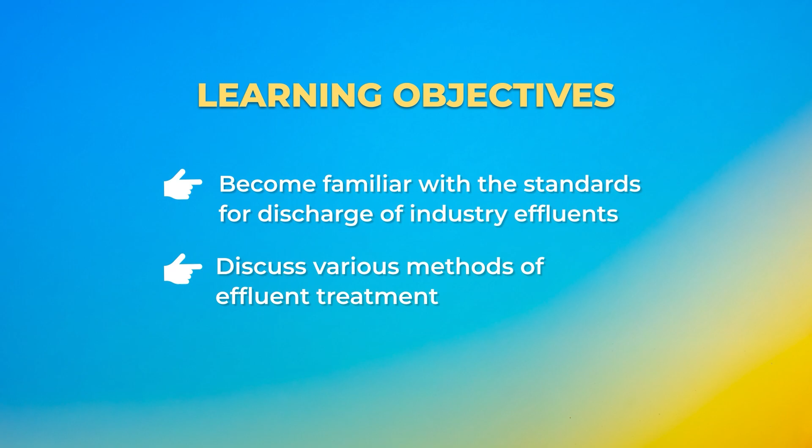Let us begin with the benefits of liquid waste management. First and foremost, proper liquid waste management can help ensure public health and safety. If the wastes are properly managed and treated, that can prevent the spread of diseases and maintain hygiene and sanitary conditions in the food industry.

Secondly, this will help minimize the environmental impact. If liquid wastes are not treated properly and are discharged into the environment, that can pollute water sources, as they contain a high quantity of organic matter. For decomposition of organic matter by microbes, oxygen is required. So the oxygen in the aquatic source will get depleted because of this dirty wastewater from the food industry, endangering the life of aquatic flora and fauna.

There is also a chance of decomposition of organic content by microbes in anaerobic conditions, leading to production of greenhouse gases that pollute the air and produce foul smell. The microbes and chemicals present in the wastewater can also contaminate the soil. All of this can be taken care of if liquid wastes from the food industry are managed properly, reducing the environmental impact.

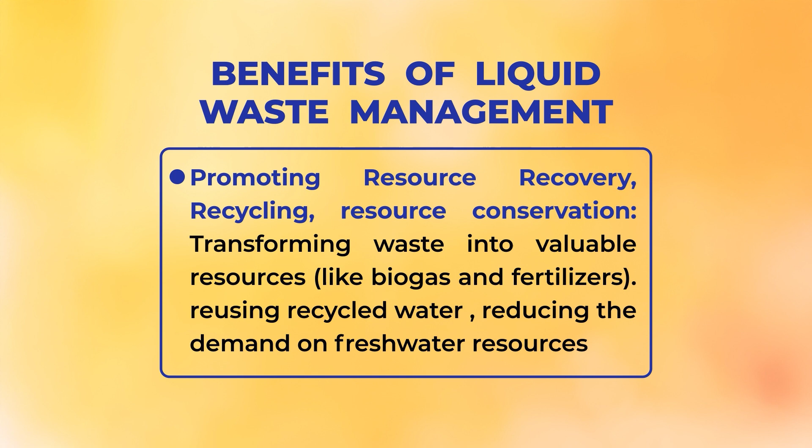Next, this will also help promote resource recovery. Some important nutrients or resources like water or energy can be recovered from proper management of liquid wastes. The liquid wastes will be recycled, and resources can be conserved. For example, if recycled water can be reused as a potable or non-potable source, there will be reduced demand for freshwater resources.

And lastly, this proper management of liquid waste also helps to comply with regulations for wastewater discharge into the environment.

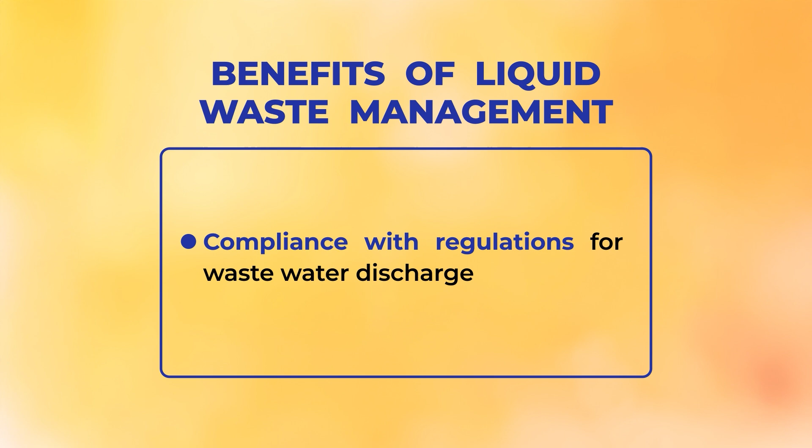Let us now see the different sources of liquid wastes in the food industry. The quantity and quality of the effluents or wastewater depend on the type of food processing industry involved. Liquid waste can be generated at different steps, starting from production, processing, preservation, and marketing. The water involved in processing the food can also form wastewater, and different parts of the food can form liquid waste in the food industry.

For example, in fruits and vegetable processing, the water used for washing the fruits and vegetables can form wastewater. And in fruit juice processing, in the canning section, the blanching section, and the washing section, some water is used which can also form wastewater.

In the meat and poultry processing area, water used for washing the carcass, washing the meats and the organs, can form wastewater. And the blood, if it is not collected properly, can also get mixed with the wastewater, forming wastewater.

The fat of the animals, similarly for fish processing also, the oils, the blood and washing water can form the wastewater. In the dairy processing unit, the liquid, the rejected milk, the whey, the buttermilk, cream, butter, these can also form the part of the wastewater.

In the beverage production area, the wastes can contain sugars, fruit pulp, and also from the alcoholic beverage production area, the fermented byproducts. From baking and confectionery, water from dough mixing or cooling. Wastes can also come from sugar, fats, tea, coffee and chocolate processing. From canning and preservation, brine, preservatives, acids can also form the wastewater. These are about the wastewater generated from food processing operations.

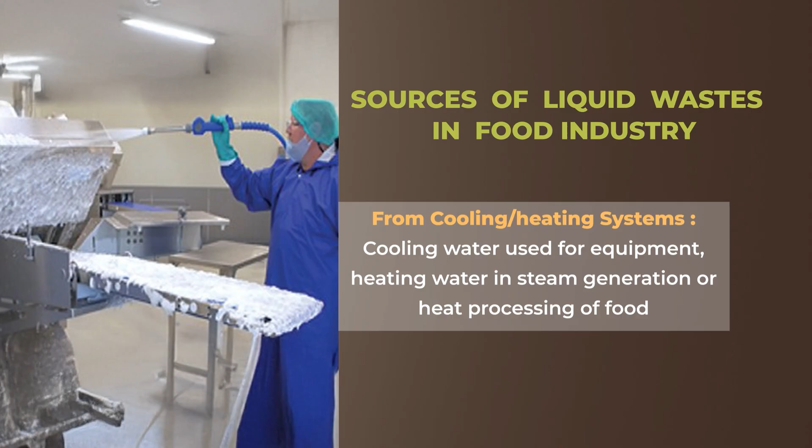From cooling system or heating system, the heating system for heating water in steam generation or for heat processing of food, that can also form liquid waste in the food industry. So these are the various sources of liquid waste in the food industry.

And as these liquid wastes come from different industries, they contain high quantity of organic content. So the characteristics of wastewater from food industry are like high organic content. All the wastewater contains fats or oils or proteins or sugars or starches, and accordingly there will be high level of biological oxygen demand, that is BOD, and chemical oxygen demand because of the high organic content.

Then another characteristic is that wastewater can have high nutrient load. So nutrients like nitrogen that can come from proteins, phosphorus that can come from additives. Then there will be also high suspended solids in the form of organic and inorganic particles, food debris, fibers that can be present in the wastewater.

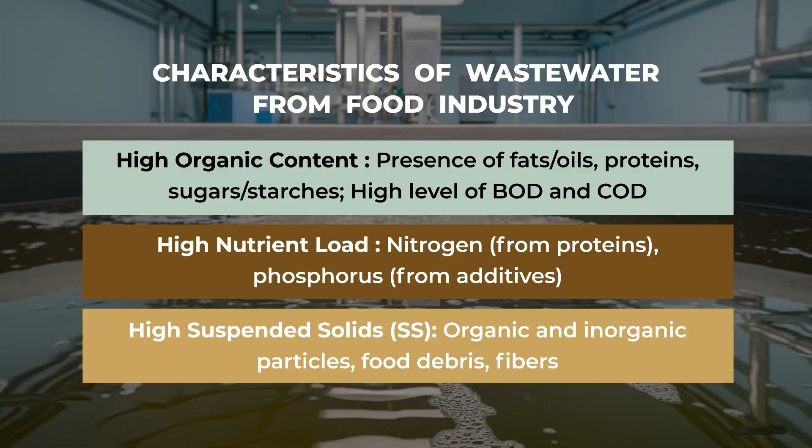Then there can be variable pH levels. pH level can range from acidic to alkaline. For example, in fruit juice and vinegar processing, that wastewater can be acidic in nature. From the dairy and meat processing area, wastewater can be alkaline in nature.

Then there can also be presence of fats, oils and grease, which are also known as FOG. That is very common in meat processing, dairy processing, frying and bakery operations.

Then color can also be an important characteristic of wastewater, because sometimes wastewater can also be discolored, especially from fruits and vegetable processing because of application of some food additives, coloring agents, and also the discoloration may be due to the decomposition of organic matter present in the wastewater.

Then there can also be odor, unpleasant smells due to the production of different sulfur, ammonia, phenolic compounds from the decomposition of organic matter and fats. There can also be turbidity because of the suspended solids and organic materials present in the wastewater.

Toxicity is also another important characteristic, because this wastewater can have some harmful chemicals, can have pesticide residues, heavy metal residues, detergents and sanitizers. It can also have different types of microbes, maybe bacteria, fungi, algae, protozoa, virus, etc. So these are the important characteristics of wastewater from the food industry.

So based on these characteristics, certain parameters have been decided which are to be considered for discharge of wastewater. And these important parameters are like the BOD, that is biological oxygen demand. So that is the measurement of the amount of oxygen which is required by microorganisms to oxidize or decompose the organic matter over a period of specific time at a specific temperature.

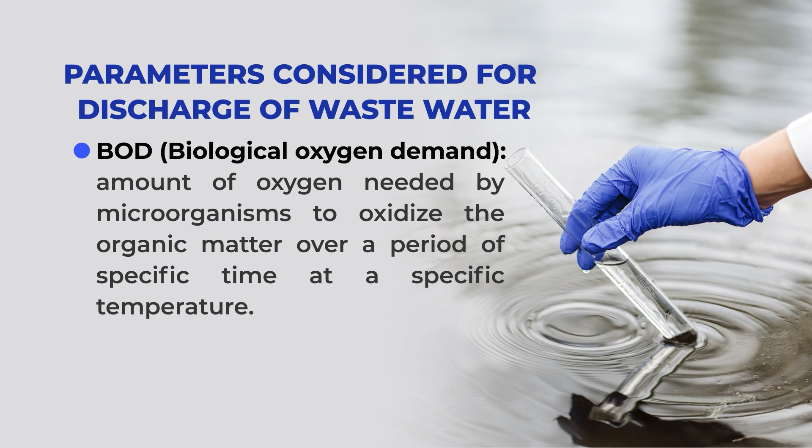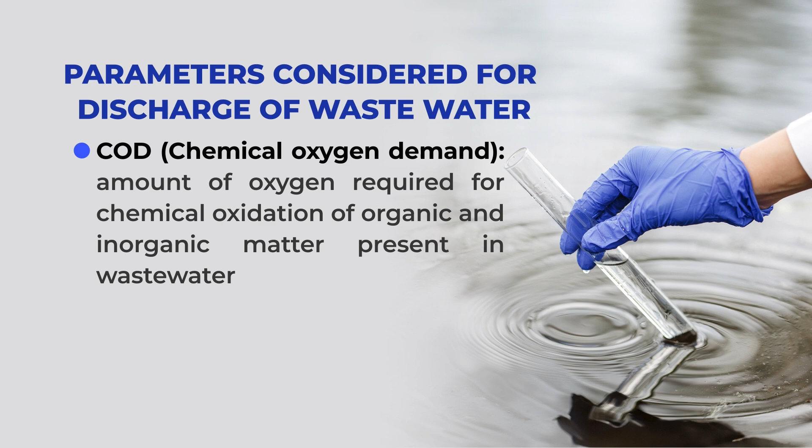If it is done for 3 days, then it is called BOD 3; if it is done for 5 days, it is called BOD 5. Then another important parameter is COD, that is chemical oxygen demand, that is the measurement of the amount of oxygen required for chemical oxidation of organic and inorganic matter present in the wastewater.

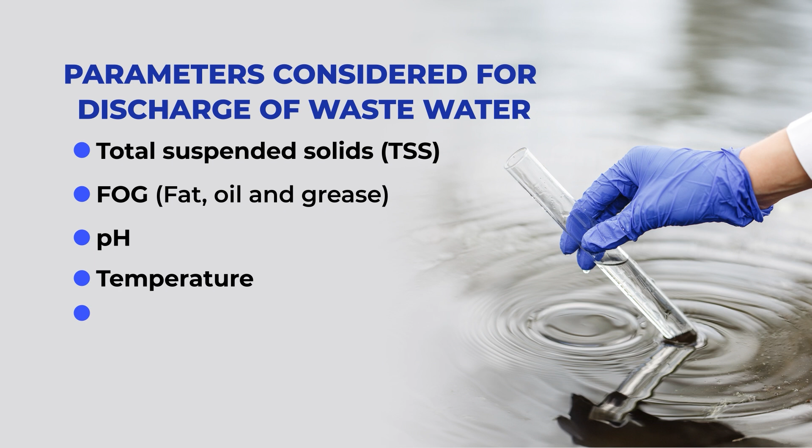Then total suspended solids or TSS, FOG, that is fat, oil and grease, then pH of the wastewater, the temperature of the wastewater, then color, turbidity, residual chlorine, residual nitrogen, ammonia, etc. All these are important parameters. There are many more parameters, but these are normally considered for the discharge of the wastewater.

So any food industry in our country, they have to follow certain rules and regulations regarding the discharge, disposal of the liquid waste into the environment.

The relevant food laws include the Food Safety and Standards Act 2006, according to which the food industry has to maintain certain sanitary and hygienic conditions, including some requirements regarding waste disposal.

Then there are acts like the Water Prevention and Control of Pollution Act 1974, Air Prevention and Control of Pollution Act 1981, and the Environmental Protection Act 1986.

As per the requirements of these acts, the Central Pollution Control Board has set discharge standards for various parameters of wastewater. Let us have a quick look at these CPCB standards. There are many parameters mentioned, such as BOD, COD, oil and grease, suspended solids, pH, and different chemical residues.

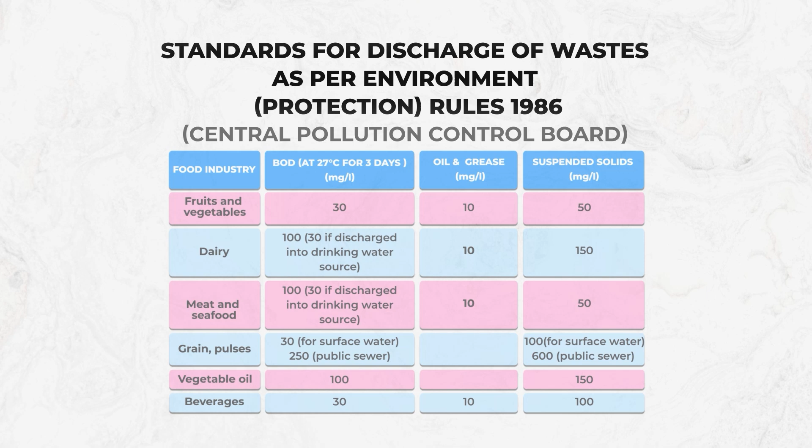In this table, I will show you only 3 parameters for different wastewater from various food processing areas. Here you can see the maximum permissible limits for BOD, oil and grease, and suspended solids, all expressed in milligrams per liter of wastewater, as per ppm.

For the BOD of wastewater from the fruits and vegetable industry, if it is to be discharged into the environment, the BOD should be maximum 30 ppm, oil and grease should be 10 ppm, and suspended solids 50 ppm.

For wastewater from the dairy, meat and seafood area, the BOD level should be maximum 100 if discharged into surface water, into the public sewer. If meant for discharging into drinking water sources, the maximum permissible limit is much lower, only 30 ppm, for both dairy or meat or seafood sections.

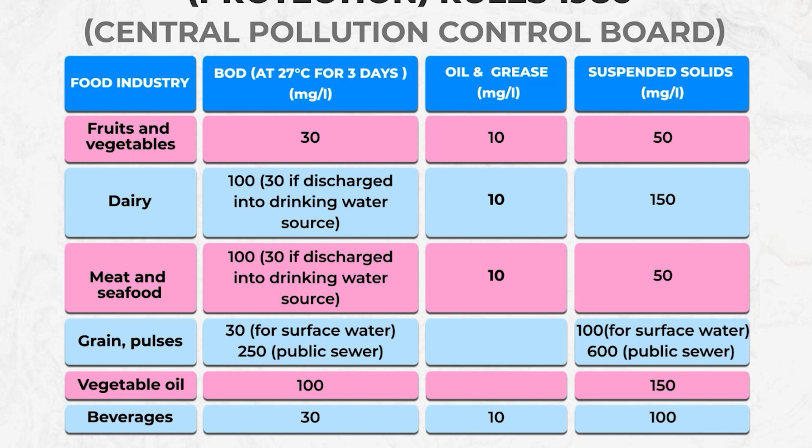From grain and pulses, the maximum permissible limit of BOD is 30, for suspended solids it is 100; if discharged into surface water in the public sewer, suspended solids can be higher, maybe 600 ppm. Same applies for vegetable oil and beverages.

For achieving these standards for discharging wastewater into the environment, the food industry needs to manage liquid waste very well. The first and foremost important part is prevention or reduction of liquid waste generation, that is reduction at the source, where if taken care of properly, can reduce the quantity of waste generated.

This can be done by implementing a very good production system, optimizing all production and processing operations, regular maintenance of equipment, and training of employees. This way the quantity of liquid waste can be reduced at the generation point itself.

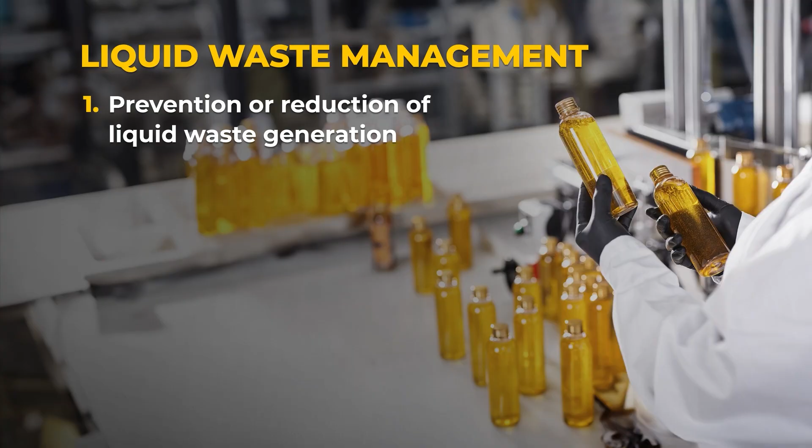After that, some important liquid waste can also be utilized for byproduct utilization. For example, whey is a byproduct of cheese production. If not used properly it becomes wastewater, but if processed it can be used for preparation of whey protein drinks, powder, or whey protein concentrates. Similarly, blood obtained from the meat industry, if collected properly and processed, can be used for edible purposes, for preparation of animal food like blood meal, and can also be used in the pharmaceutical industry. This way some wastes can be used for byproduct and value-added product preparation.

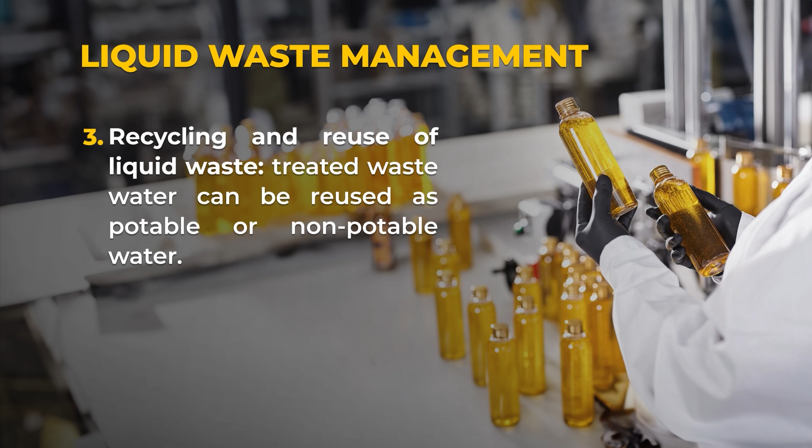After that, the wastewater can also be recycled and reused. Treated wastewater can be reused as potable or non-potable water depending on the final quality of treatment. It can also be used for recovery of nutrients, such as nitrogen or phosphorus, or for resource conservation, like recovering biogas from the processing of wastes.

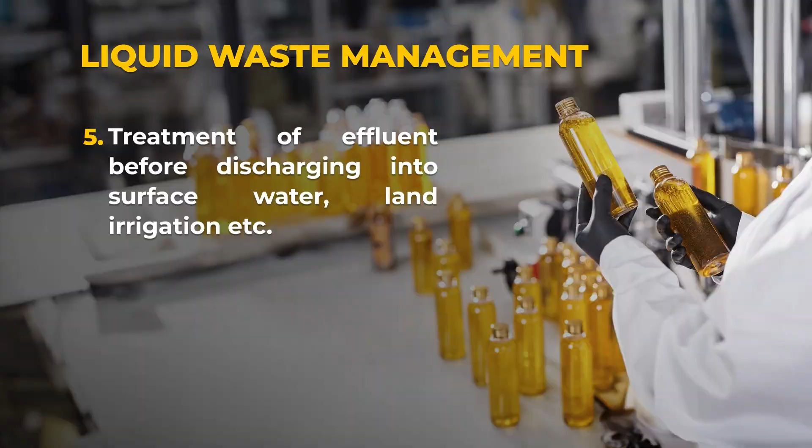And if these are not possible, if the food industry has to discharge wastewater into the environment, they also need to treat the effluents before discharging into surface water or land irrigation, etc. So for the treatment of wastewater, the food industry needs to have an effluent treatment plant, called ETP.

The design of the ETP depends on various factors, like the size and capacity of the industry, the volume of wastewater generated, the wastewater characteristics, the required characteristics in the treated effluent, budgetary considerations, and whether it would be viable to go for systems that generate energy like biogas or heat.

Depending upon all these factors, the industry needs to design their ETP, and it is not possible for all food industries to have their own ETP. For example, small food processing industries may not have a proper ETP, but they also need to at least give pre-treatment or primary treatment to the wastewater to reduce the organic content load and reduce the microbial load, through physical and chemical processes, before they discharge it into the public sewer for further processing.

For large food industries, they can have a proper ETP and use physical, chemical and biological methods along with advanced technologies to treat the wastewater, and can reuse it or discharge it into the environment. Now we will see the different methods of wastewater or effluent treatment.

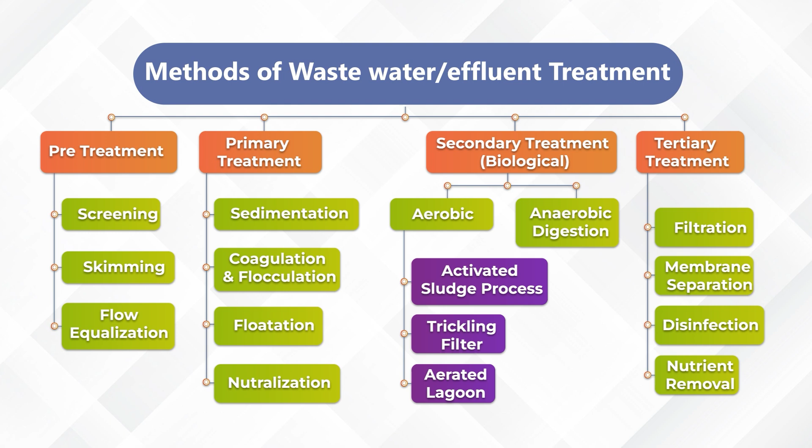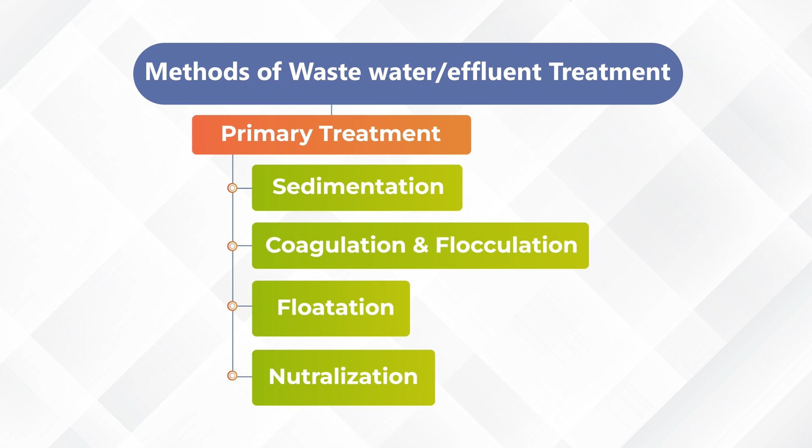For effluent treatment, industries can follow various physical, chemical and biological methods. At the pre-treatment stage, physical methods like screening, skimming and flow equalization can be adopted. Next is primary treatment, where physical methods like sedimentation and flotation are used, along with chemical methods like coagulation, flocculation or neutralization. The next stage is secondary treatment, which is also biological treatment, since microbes are utilized for decomposition of the organic content of the wastewater.

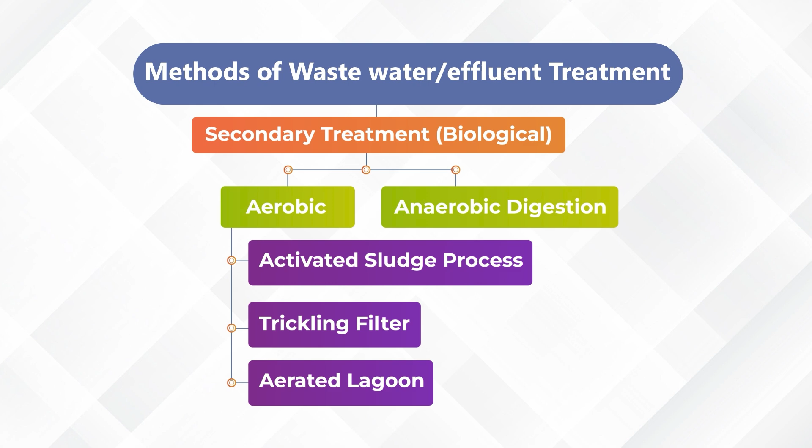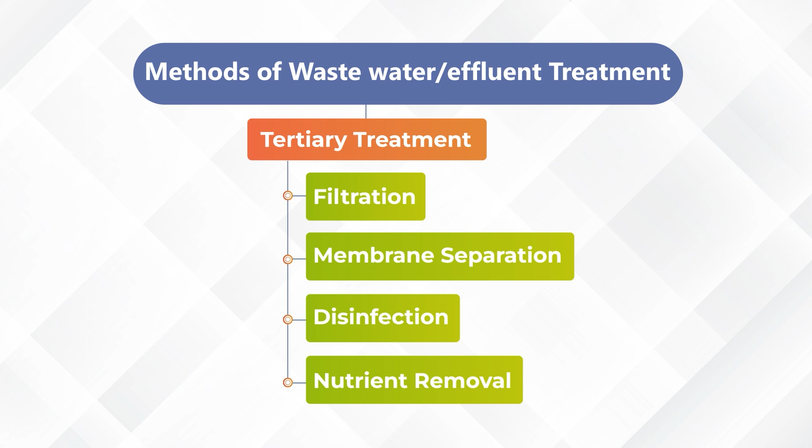In secondary treatment, there can be aerobic digestion or anaerobic digestion. For aerobic digestion, methods like activated sludge process, trickling filter, and aerated lagoon can be used. For anaerobic digestion, anaerobic lagoons or anaerobic digesters can be used. After secondary or biological treatment, you can also go for tertiary treatment, where methods like filtration, membrane separation, disinfection and nutrient removal can be done.

Now I will discuss all these methods one by one. In the pre-treatment phase, screening, skimming and flow equalization are done. Screening is the first and most frequently used process for removal of large solid particles, using different types of screens like vibrating screens, static screens or rotary screens. Sand or gravel-like components can also be removed using grit chambers.

Skimming is used for removal of large floatable solids present in the wastewater. Floatable solids can include fats, oils or grease. These can be removed by the skimming method, which helps prevent clogging of pipes. Skimming can be enhanced by mechanical aerators and also by addition of chemicals like lime, alum, etc.

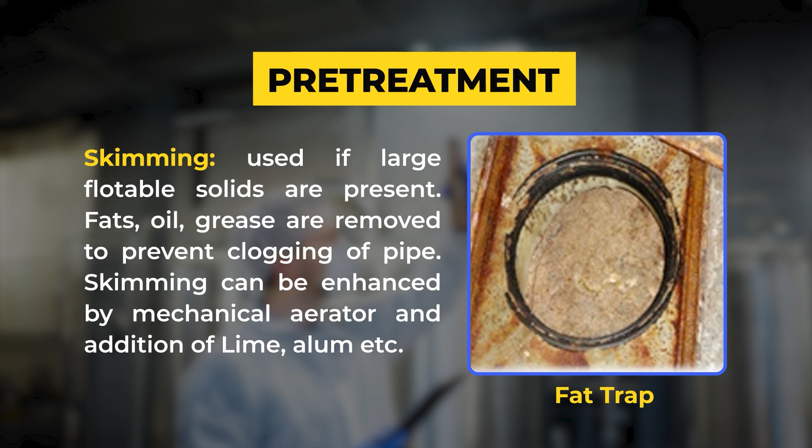The next method is flow equalization. This is important because in a food processing industry, liquid waste is not produced in equal quantity throughout the day or operational time. So, to overcome operational problems due to flow variations, equalization is very important, and the flow rate should be uniform. For this purpose, an equalizing tank is used, which can store wastewater for recycling and reuse, and also feed the flow uniformly to the treatment facility throughout the day. This is also designed for sufficient mixing of solids, which prevents sedimentation.

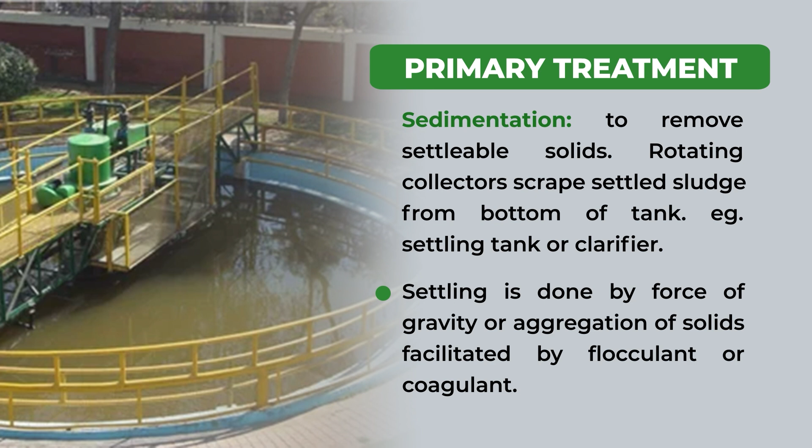After pre-treatment, the wastewater goes for primary treatment. The first physical method here is sedimentation, which helps remove settleable solids. Rotating collectors used in the settling tank or clarifier scrape the settled sludge from the bottom of the tank. Settling can be done by force of gravity, or aggregation of solids can be facilitated by flocculants or coagulants.

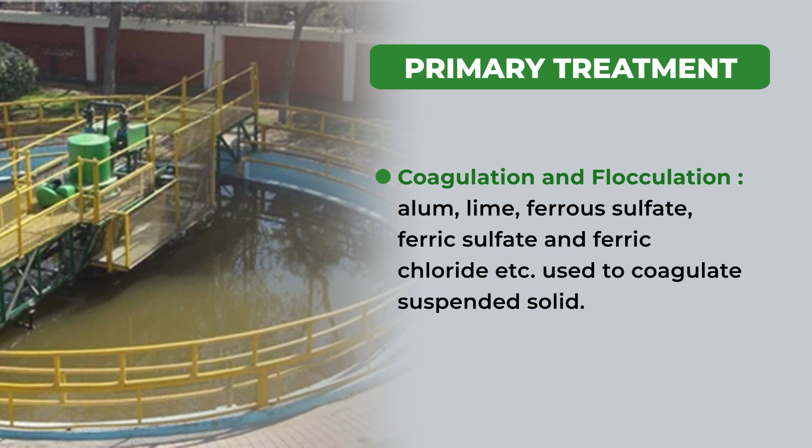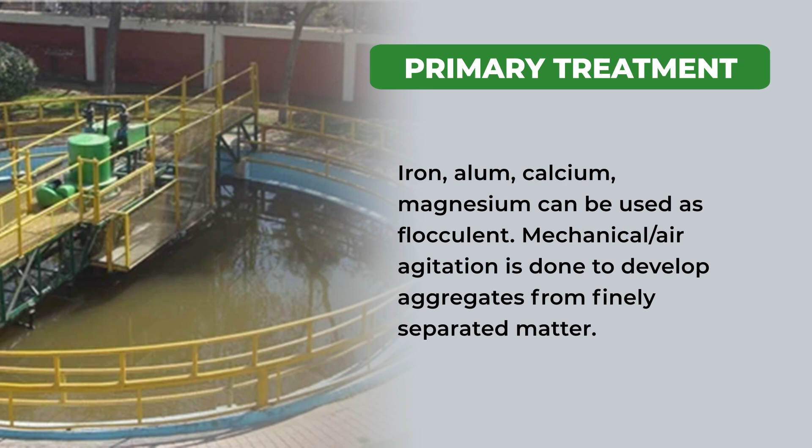As coagulants, alum, lime, ferrous sulphate, ferric sulphate and ferric chloride can be used to coagulate suspended solids, and as flocculants, iron, alum, calcium, magnesium can be used. Mechanical or air agitation is also done to develop aggregates from finely separated matter. The next physical method is flotation, which is done to remove solid or suspended particles by introducing air bubbles.

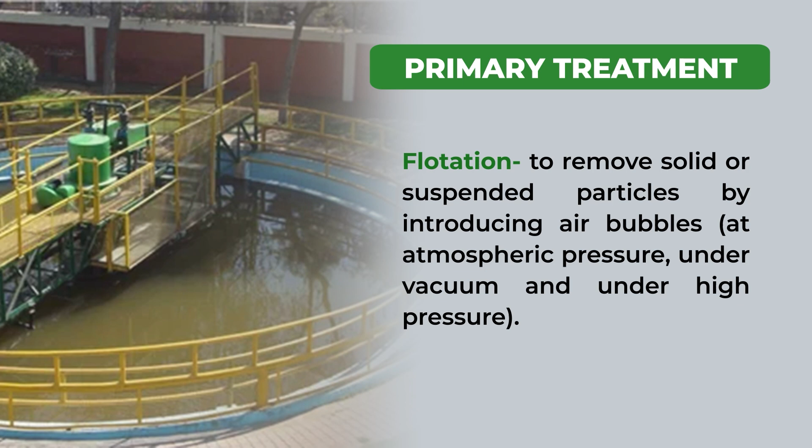Air bubbles can be introduced in the wastewater at atmospheric pressure, under vacuum, and under high pressure. One good example of this flotation is dissolved air flotation, which is widely used. Suspended particles rise to the surface to form a scum blanket, which is separated by skimming devices, and oil and grease are also removed easily by this flotation method.

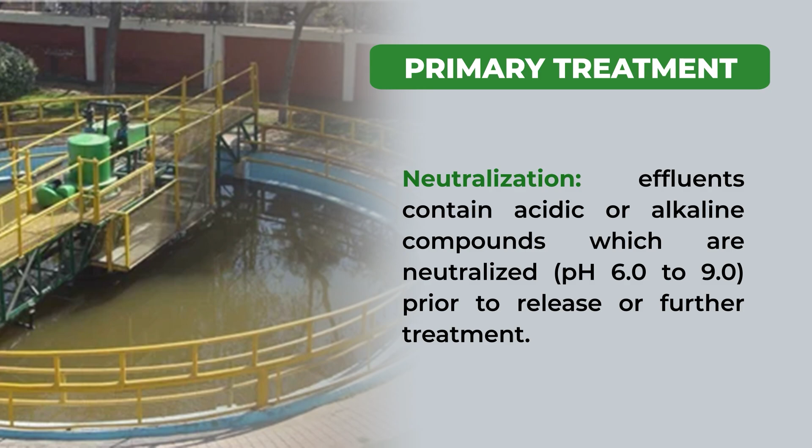The next method is neutralization, a chemical method of treatment at the primary treatment level. Effluents contain acidic or alkaline compounds. For example, from vinegar production or fruit juice production, the effluent can contain acidic components, and some effluents can have alkaline components. So the pH of the wastewater can vary from pH 6 to 9.

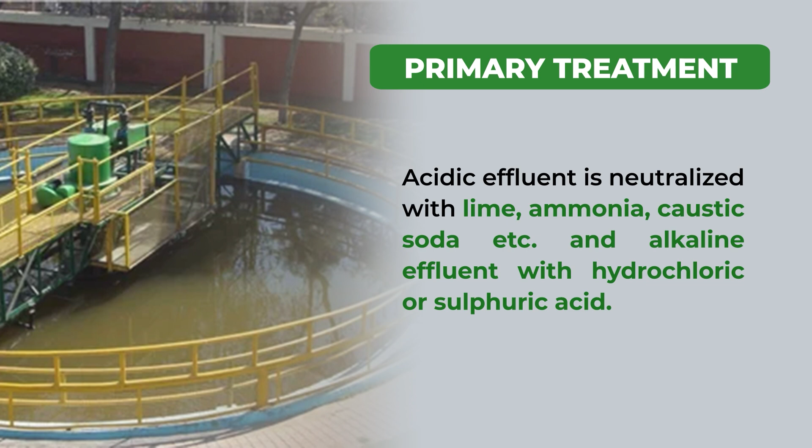Just to neutralize that, different neutralizers can be used. Acidic effluent can be neutralized with the help of lime, ammonia, or caustic soda, and alkaline effluent can be treated with hydrochloric acid or sulfuric acid, etc., to neutralize it. After all this treatment, whatever sludge is produced, that collected sludge from the primary treatment should be concentrated and treated before final disposal.

After the primary treatment, the treated wastewater is sent for secondary treatment, where microorganisms help in decomposition of the organic and inorganic components present in the wastewater. Secondary treatment can be anaerobic or aerobic.

First we will see the anaerobic digestion of organic components. Anaerobic digesters are lagoons that produce methane, carbon dioxide gas, etc. It helps produce a lesser quantity of sludge, and the BOD reduction is almost 60 to 80%, and normally it is followed by aerobic lagoons or trickling filters. It is a cheaper method and produces less amount of sludge.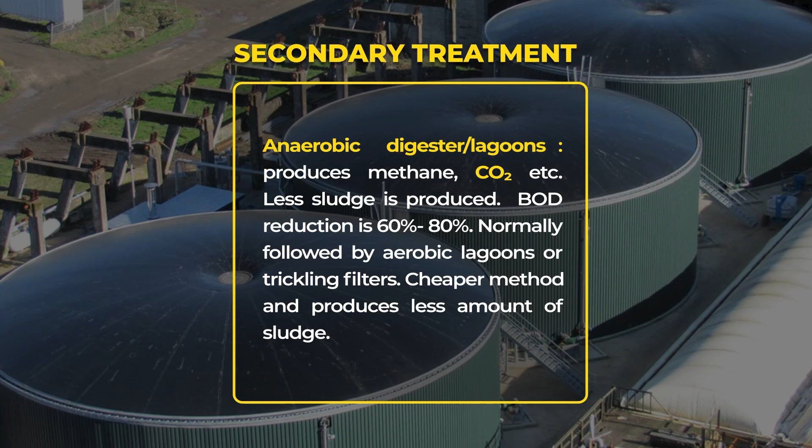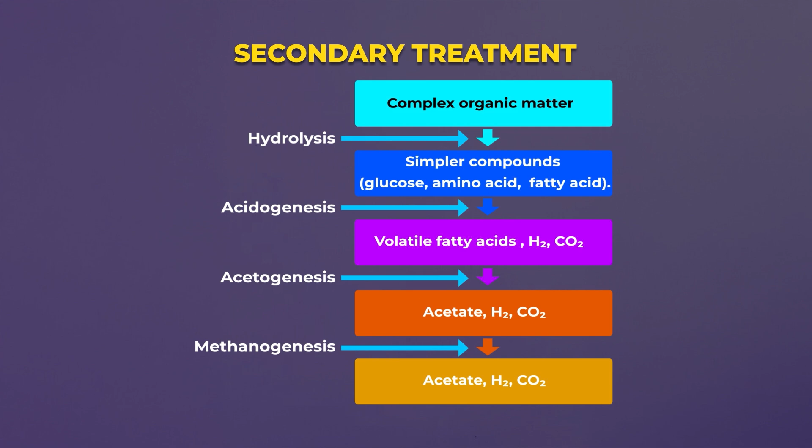Then comes the role of acetogenic microbes, which convert these volatile fatty acids to acetate. Then methanogenic microbes convert the acetate into methane, carbon dioxide, water, and biomass. This is how the biomass, that is the sludge, is produced, and the methane gas is produced, which can be used as biogas or a source of heat energy.

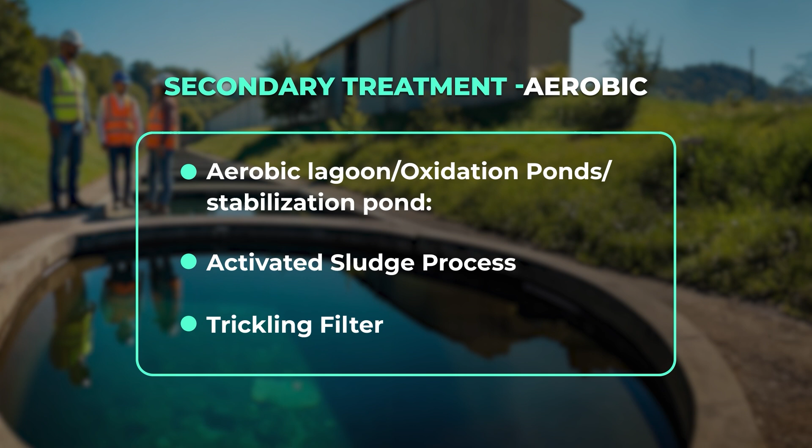In aerobic secondary treatment, there are different methods which can be followed, like aerobic lagoons, oxidation ponds, activated sludge process, trickling filter, etc. In aerobic digestion, microbes degrade organic matter to carbon dioxide, water, and biomass, and this process reduces the BOD and suspended solids to a great extent and produces a good quantity of sludge also.

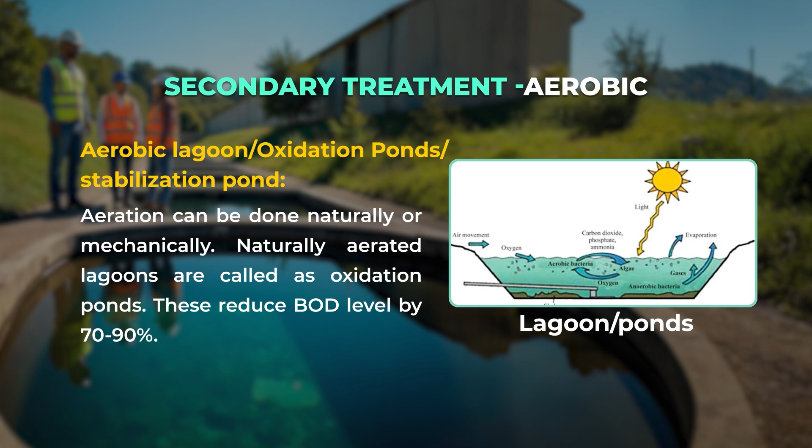Now we will see what happens in the aerobic lagoon, oxidation pond, or stabilization pond. These are shallow ponds where algae and bacteria work together in presence of oxygen and sunlight and degrade the organic matter present in the wastewater. Aeration can be done naturally or mechanically. If naturally aerated, lagoons are called oxidation ponds, and this method reduces the BOD level up to 70 to 90%.

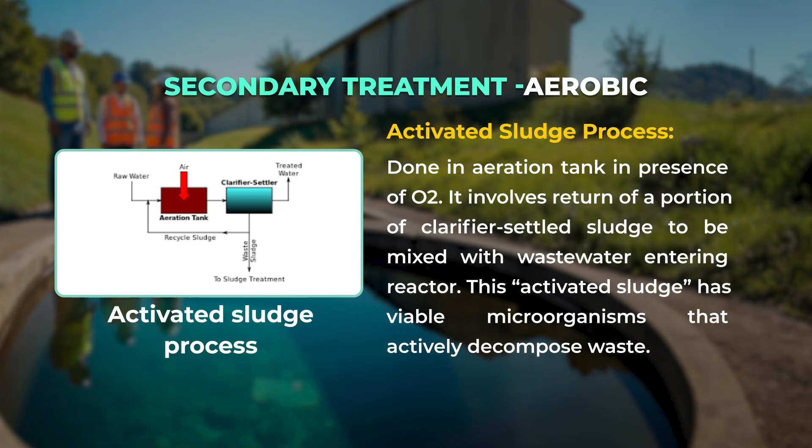The next is the activated sludge process, where the wastewater is treated in an aeration tank where air is mixed with the raw wastewater, and they are allowed to stay there for some time. Then in the clarifier or settler it is allowed to settle down, producing the treated wastewater and sludge, and some part of that sludge is returned to the aeration tank, which provides the microbial source for decomposition of organic waste. That is why this is called the activated sludge method. Activated sludge actually has viable microorganisms that actively decompose the wastes.

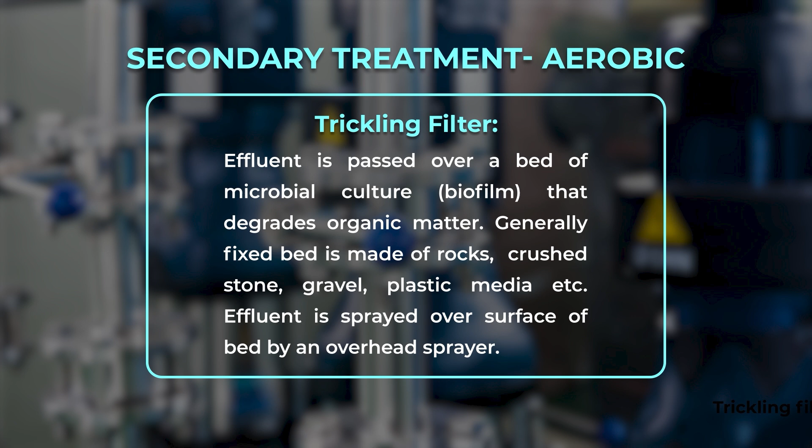Next is the trickling filter, which also applies decomposition of organic waste with the help of microbes. Here effluent is passed over a bed of microbial culture that forms a biofilm which degrades the organic matter, and the fixed bed of this treatment filter is made of rocks, crushed stone, gravel, plastic media, etc. Effluent is sprayed over the surface of the bed by an overhead sprayer, and after reaction with the microbes, the wastewater comes to the bottom side and is allowed to settle down. There will be formation of sludge and treated wastewater.

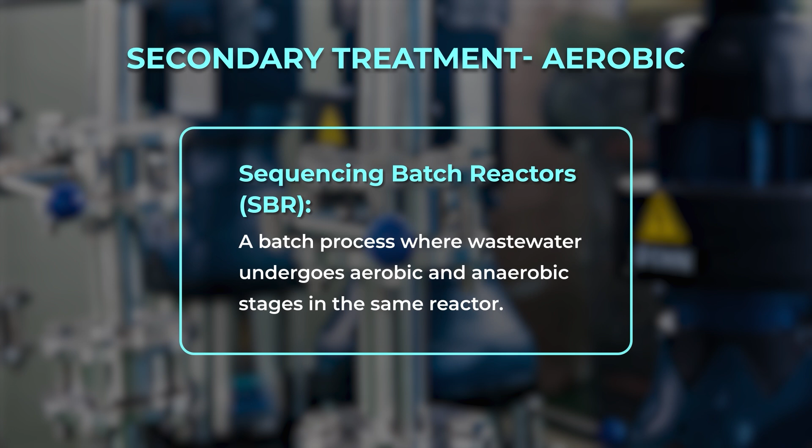Then another process is sequencing batch reactors, SBR. This is a batch process where the wastewater undergoes both aerobic and anaerobic stages in the same reactor.

So, these are all about the secondary treatment. If the ETP has the facilities for further treatment of the wastewater, if they have the advanced technologies for the treatment, they can go for the tertiary treatment.

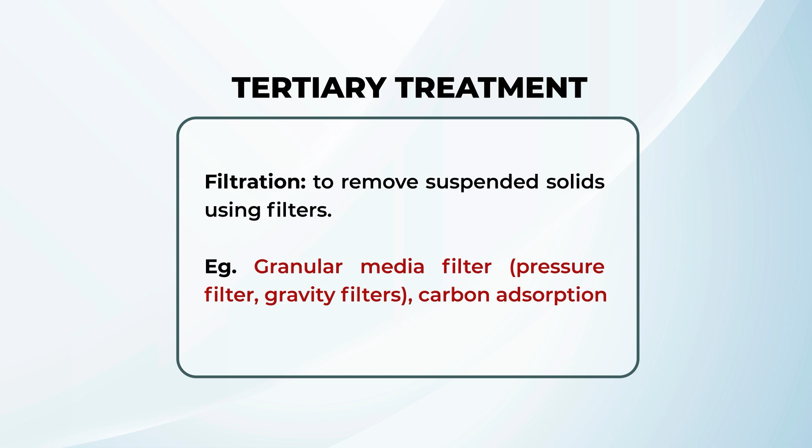Tertiary treatment includes filtration, which helps to remove the suspended solids using different filters. Filters can be granular media filters, which are pressure filters or gravity filters. There can also be application of activated carbon adsorption method, which will adsorb the suspended matter along with

the activated carbon and remove suspended solid particles from the wastewater. Then there can also be application of membrane separation. This will help to remove fine suspended and dissolved solids, maybe organic or minerals, on the basis of selective permeability of one or more components of wastewater through a membrane.

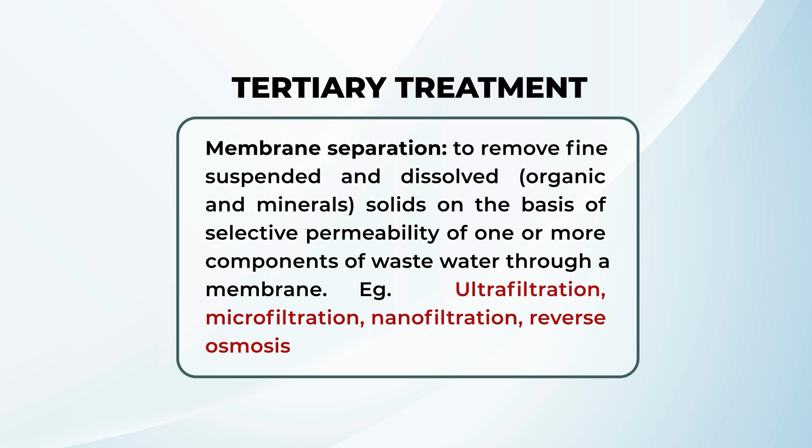Depending on the pore size of these membranes, the method can be ultrafiltration, microfiltration, nanofiltration or reverse osmosis. So, filtration and membrane separation help to remove the suspended and dissolved fine solids from the wastewater, but still the wastewater can have some microbes.

So, next step is the disinfection. Disinfection ensures that water is free from any kind of pathogens, and for disinfection there can be use of ultraviolet rays, and ozone or chlorine treatment can also be done.

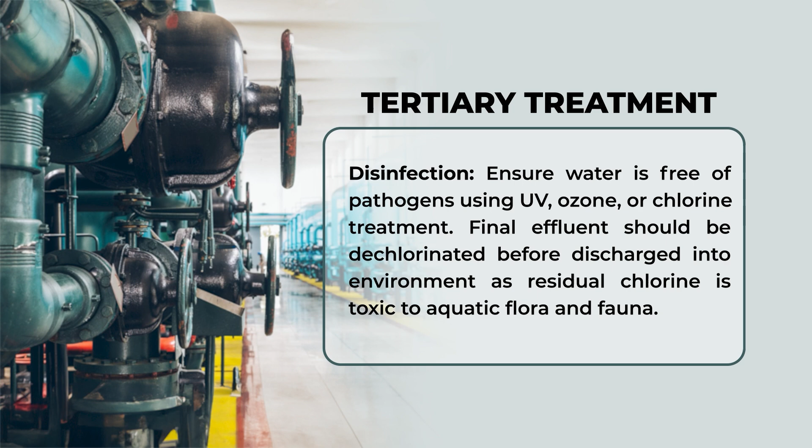But after chlorine treatment there is also a chance of residual chlorine present in the treated water. So, that has to be dechlorinated before being discharged into the environment, as the residual chlorine is toxic to the aquatic flora and fauna. Next is the nutrient removal.

As I mentioned, the wastewater can have some nutrients like nitrogen or phosphorus, those are to be removed from the wastewater. Otherwise, if this treated wastewater along with nitrogen and phosphorus is discharged into the waterways, water streams, river or pond, then that will cause eutrophication and help in algal bloom in the water bodies, which is not desirable at all.

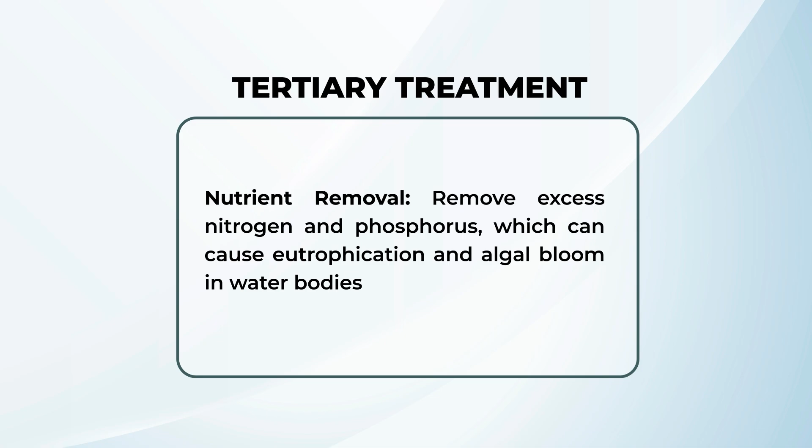So, all these nutrients are to be removed at the tertiary treatment point. So, ultimate disposal of the liquid, that is the treated wastewater and the sludge. The treated wastewater can be reused in the food industry, can be discharged into the river, pond, ocean or for

land irrigation. It can be reused as drinking water quality if the quality of the treated wastewater is of drinking water quality, or it can also be used for non-process purposes, for cooling, for cleaning of areas which are not the food contact surface. So, for non-process areas also this treated water can be reused.

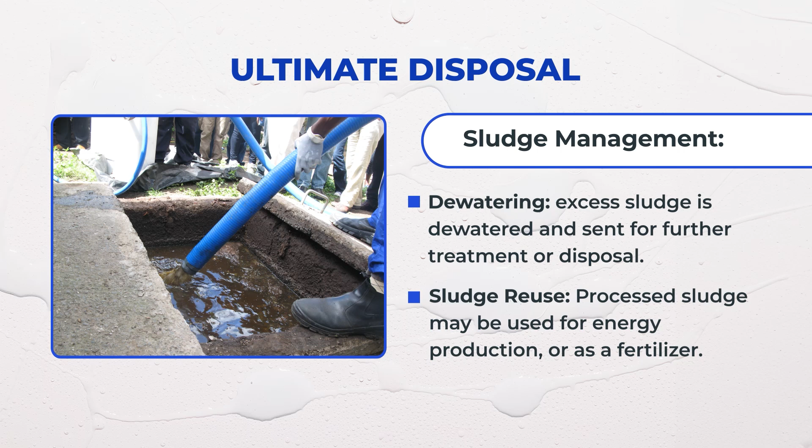And the solid which we get from the treatment of this wastewater, that is the sludge, that can also be properly managed, firstly by dewatering. Excess sludge is dewatered and sent for further treatment or disposal, and sludge can also be reused for the production of energy, the biogas, or can be utilized as fertilizer.

So, this is all about the management of liquid wastes in the food industry. So, now it is time for summarizing the whole session. What we learned today: first, we discussed that the food industry produces huge quantity of liquid waste during production operations, cleaning, sanitizing and packaging, etc.

Wastewater is characterized by high organic matter, suspended solids, fat, oil, grease, color, odor, turbidity, toxic materials, microbes, etc. Liquid waste management ensures public health and hygiene, reduces the environmental impact, ensures resource recovery and conservation, ensures compliance with government regulations. And effluent should be treated properly before discharging into public waterways, and the standards are set by the

Central Pollution Control Board, which are to be followed by the food industry. Then effluents can be treated by pre-treatment, primary treatment, secondary treatment and tertiary treatment methods.

In the pre-treatment phase, methods like screening, skimming, equalization can be done. Primary treatments like sedimentation, coagulation, flocculation and neutralization can be done. In the secondary treatment, that is the biological treatment, anaerobic or aerobic digestions, aerobic lagoons, trickling filters, activated sludge method can be followed.

In the tertiary level, advanced technologies like filtration, membrane separation, then disinfection of the wastewater is done. And finally, the treated wastewater can be reused as non-process water or drinking water or discharged into a river, pond, ocean, land irrigation depending upon the quality of the final product. And sludge can be used as fertilizer and used for biogas production.

This is all about the basics of the management of liquid wastes in the food industry. I hope that you could learn the basics of liquid waste management and you will be able to respond to the quizzes which will be shared with you after this session. I wish you happy learning.